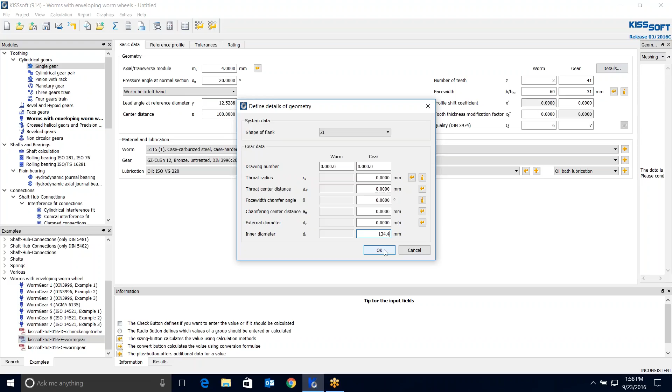The other information I need to populate in here is I need to define what the flank of the tooth is going to be for the worm gear. In this case, it's going to be a ZI. Additionally, the inner diameter of the gear itself will be 134.4 millimeters. That is a given. That's in the example text. It's the inner diameter of the gear, the large gear. And we say OK. Well, we don't have a rating. We can turn that off right now so we can see what we get calculated here. We get a consistent calculation, and it tells us that this is our reference operating diameter.

Okay. The next thing we want to do is define a profile. We've been told in the information that the tip clearance is 0.8 and the root radius coefficient is 0.2. So the root diameter is 26.4, and that also is given. And the external diameter of the worm gear is 44, so that also is given. So this reference profile is not what we're going to use for the worm. We're going to change this to own input, and the root radius coefficient here was 0.2. We're going to size this addendum coefficient, and that should be 0.2 when it's all said and done.

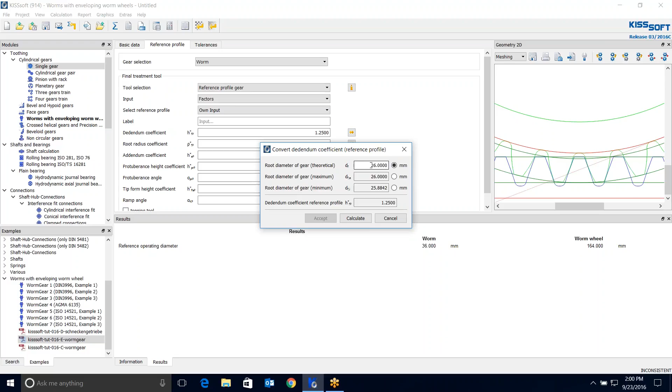And let's do the addendum first, because that's 44 and that's a given. So if it's 44, we calculate that, and we're given the root diameter here, which is 26.4, and we calculate that. We get 1.2, 2, and 1. This is our reference profile. It's a DIN profile. And we're going to do the same thing for the gear, but for this I'm just going to go find that profile because one exists. It's a DIN profile, and it's right here. 1, 2, and 1. And I can do that back here too for the worm. I'm going to just go find this DIN profile.

1, 2, and 1. And now I have a defined profile for this worm gear pair. We were told that the effective tip clearance is 0.8. I want you also to know that you can define what that tip clearance is by looking at the addendum coefficient 1 and subtract the difference between the dedendum coefficient and the addendum coefficient, which in this case is 0.2. It's a factor. If you multiply that factor by the module, you get 0.8. And that's what your theoretical tip clearance should be.

You're going to wonder where some of those numbers came from. That's where it came from. Okay? Tolerances. We're not going to go according to Niemann. We're going to put our own tolerances in here. And we're going to do that for both the worm and the gear. The tolerances are given. For the worm, it's minus 0.1.

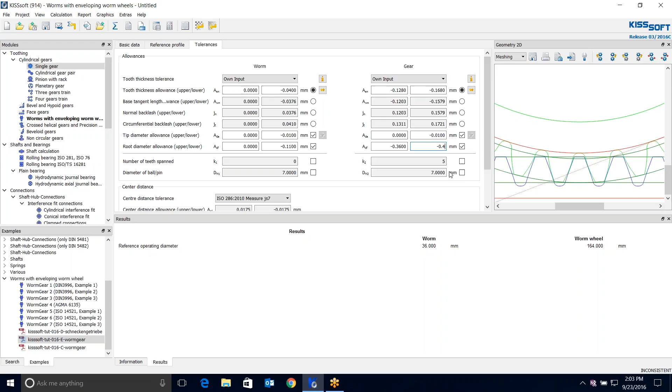Now, if you have your own set and you're going through, you can always define what this input is, or you can go by a standard. We know that the center distance standard is going to stay this measurement JS7. We're not changing that, so this is our plus/minus center distance value. We go ahead and solve. We have a consistent design.

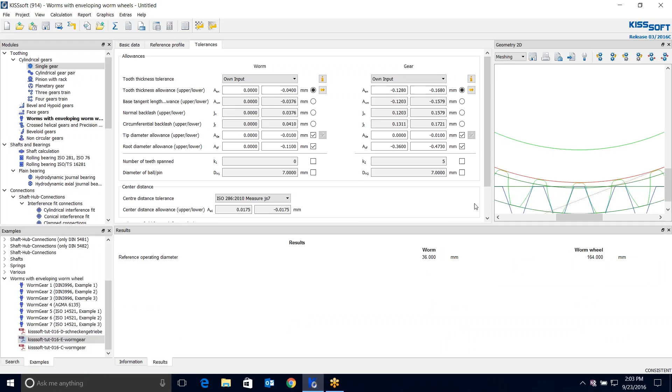One last thing we have to do in our data tab is we need to define some of this information about the worm wheel, which is enveloping. You can see an enveloping worm wheel is a little different than a straight worm. We have a throat radius and a throat center distance, outside diameter, etc. So nice thing with KISSsoft is we can size the radius, we can size the throat distance.

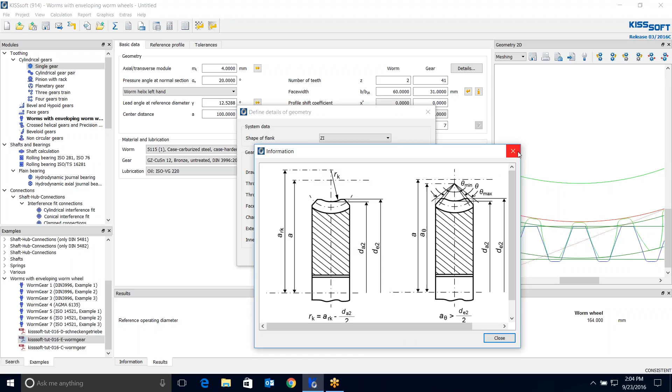We're going to leave this face chamfer angle at 0, but if you were interested in giving that a chamfer angle, it'd be right here. Okay, so 0 I think is a good number here. We're going to size that chamfering distance, and we're going to size the external diameter of that particular worm wheel. All right. We solve, we have a consistent number.

Now we want to look at the rating for the pair, so we turn the rating on right here, and some information that is given to us later is we have a power input of 5.3 kilowatts. The worm is driving, and a speed of 1500 RPM. We know that they want 25,000 hours of service life, and the application factor is 1.00. Okay, it automatically populates our torque based on our power and speed, which is nice.

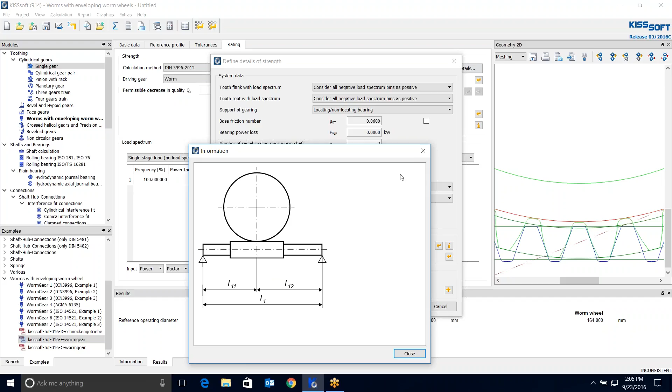We've defined our data, our profiles, and our tolerances, and we can calculate. It tells me the minimal safety is not reached. So let's look at that. So I have a minimal flank safety, it looks like, that doesn't reach. And I have a safety against wear. The safety factor for the temperature is pretty good, but wear and flank safety are below the safety factors I need. Also, our total efficiency is kind of low, but our safety against deflection for that worm gear and shaft is pretty good.

All right. This is why I mentioned earlier that we don't always know what our oil needs to be. If you have an oil that you use traditionally in production, you use that, of course. In my case, I don't specifically have an oil that I like or dislike, but I do know that I can try and size this, and it's going to say I need a nominal viscosity of 323 millimeters squared per second, and I'm pretty sure that the oil that I have at 40 degrees is not that.

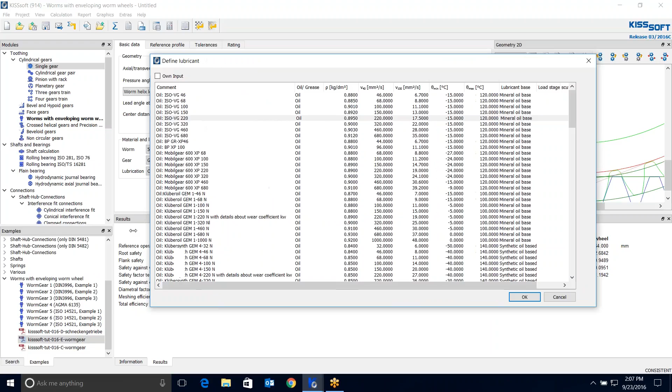If I go in here and I open this up, I can kind of look and critique the oils I have, and if you look at this, it says 220 for that oil, and that's not going to be good enough for us. So maybe we can bump it up to the 680 and do a calculation. It still says it's not reached, but it's better. You can see that my safety factor for temperature is up and my flank safety is up. So let's go all out and find out what I need to have for an oil.

I'm going to go ahead and sort this from the top down, and it appears to me that my kinematic viscosity at 100 degrees C at 35 is not enough. So I need to bump this up, and I'm going to go ahead and bump it up to maybe this one right here. This oil, it's a little heavier. You can see the density is a little bit more. I have a higher viscosity, and let's take a look.

Okay, my safety against wear was improved. My flank safety is above 1, and my safety factor of temperature is also above 1. You can also look and see that my efficiencies dramatically increased. It went from like 70 to 85, or 77 to 85, and 89%. So this is a pretty nice improvement for where we were.

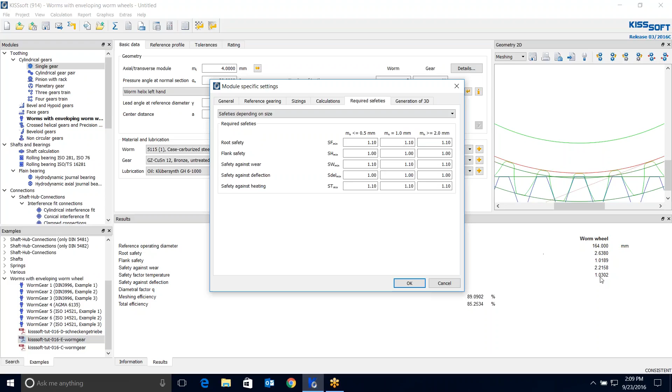If I look in my module-specific settings and go to my required safeties, you can see I have the heating that's 1.1. Safety against deflection is 1. Against wear is 1.1, 1, and 1.1. So you could argue that maybe I'm not quite high enough on the safety against temperature. If that was the case at this point, I would maybe look at even a better oil, and maybe I look at maybe this one right here. We do a calculation.

So this is negative. Let's go ahead and make that change back. I must have grabbed the wrong one. Let's look at that again. All right, 167. Oh yeah, it went down. So we could really go for a good one and get this Ultra right here, this Klüberfluid C_F 8 Ultra. See what that does for us. Oh, not reached. So maybe that one I grabbed was the right one, right?

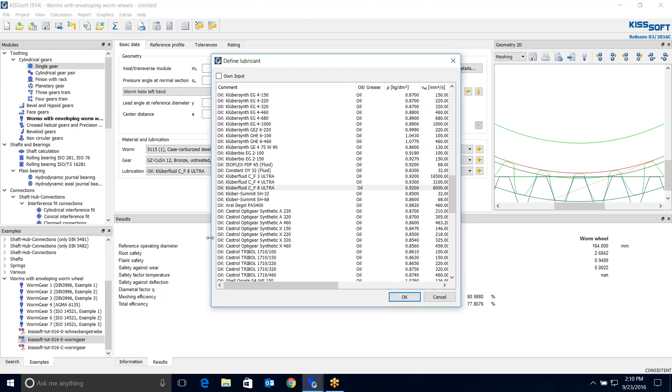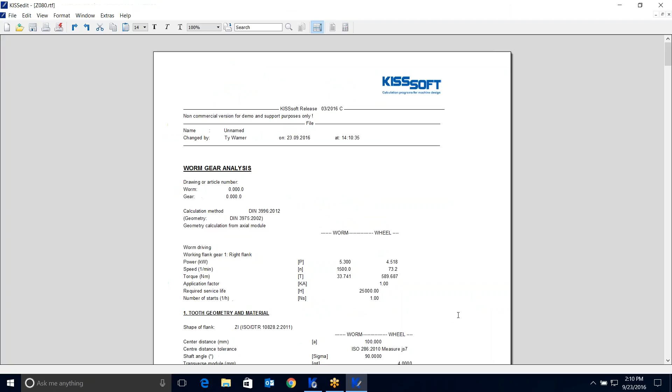You can click through there and choose different oils and choose your own oils as well. In my case, I happen to think this heavier oil was a better choice for me, which was right here. And we can go ahead and solve that. And I'm not getting warnings. This is pretty close to what I wanted. I would say I'm probably okay at this point. I have good efficiencies, and my rating is good. I can run a report quick, and I can look at the information that I inputted in my results.

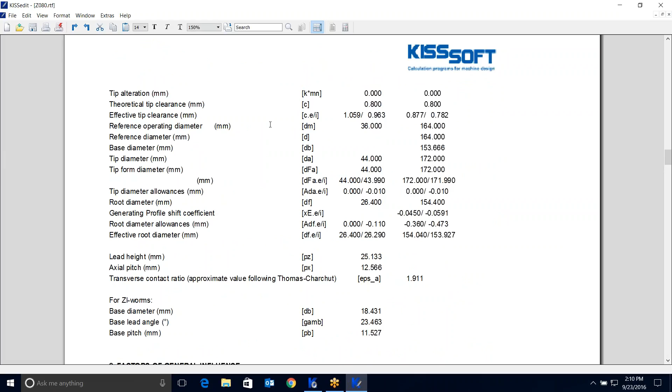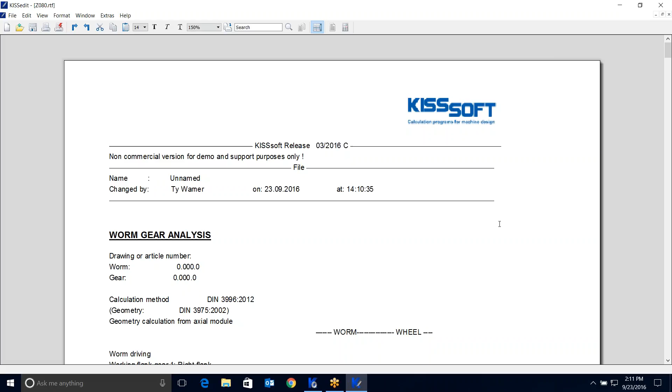Incidentally, I want to look at that 0.8 tip clearance. It's going to be at the end of section 1. Right here, theoretical is 0.8. Okay? And that's a worm with enveloping wheel calculation. Pretty simple, actually, and very quick and powerful.

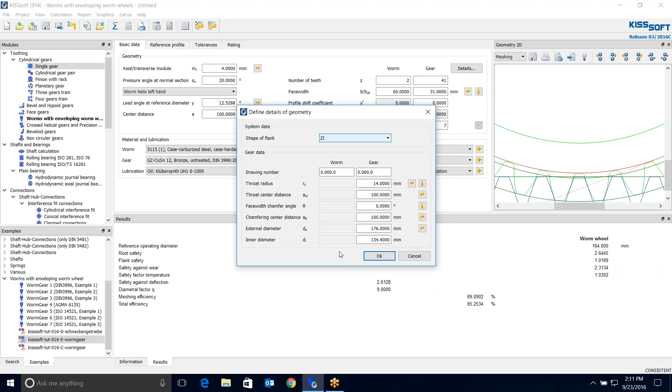If you were going to make changes, you can definitely come in here and make changes to this shape of the flank. You can change this. You can save the DXF files and actually import them into the cross axis module if you have a specific shape of flank you're going to use with the design. And then you can use that shape to populate your next teeth. So this is worms with an enveloping worm gear. It's kind of a basic entry type of tutorial, but it's very powerful if you're using this kind of a gear pair combination in your designs and applications.